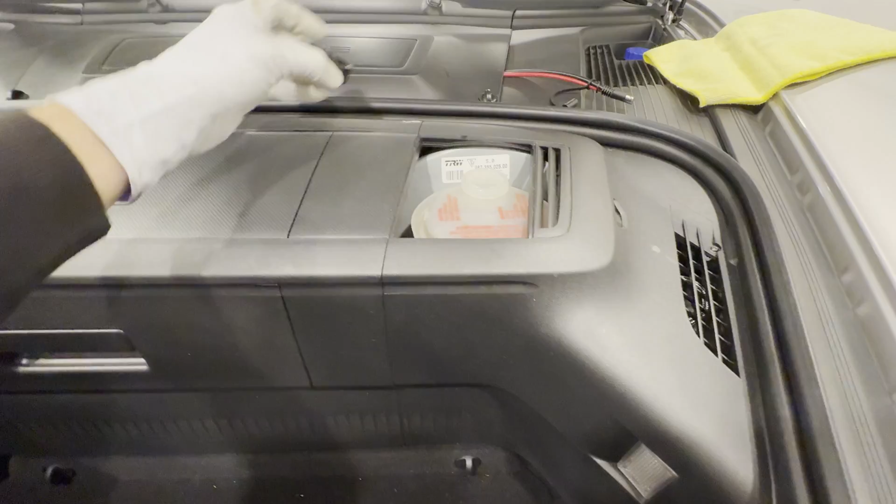You're gonna go ahead and buy a Motive power bleeder.

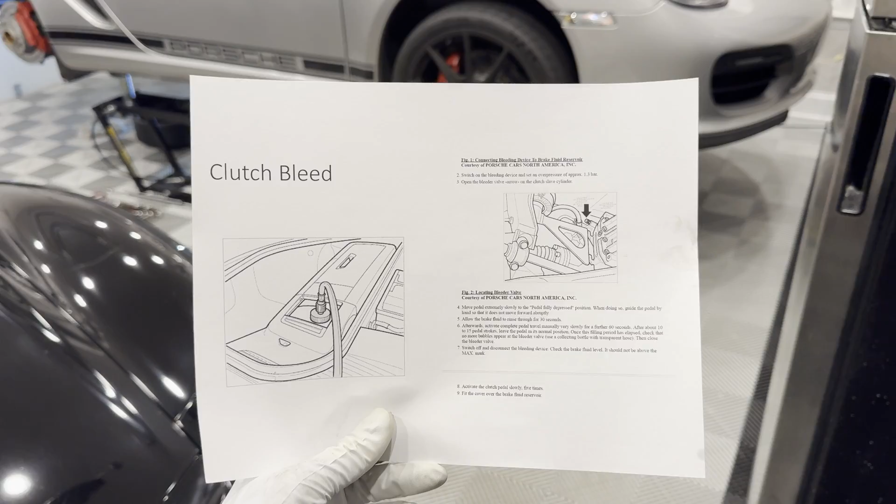And take some of your brake fluid, and you're gonna pour these bottles into this open container. All right, guys, straight from the Porsche factory instructions themselves. What we're gonna do is hook up this power bleeder to the brake fluid reservoir, and then we're going to pressurize this container to 1.3 bar.

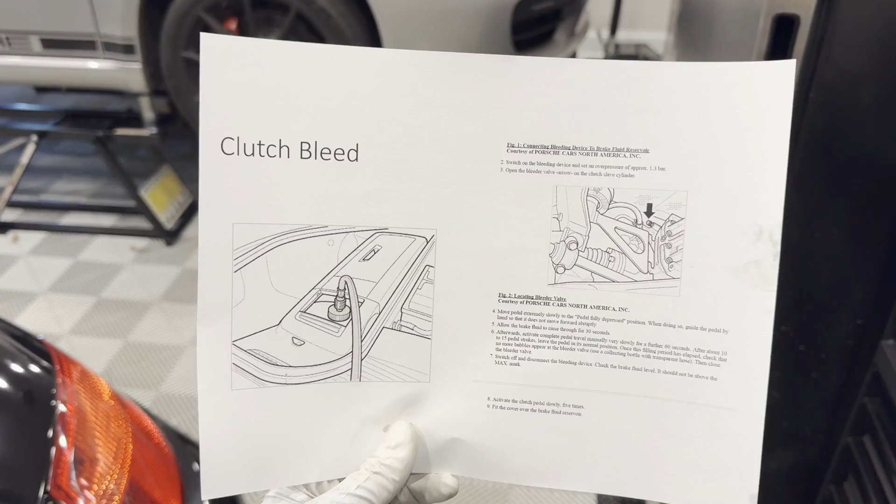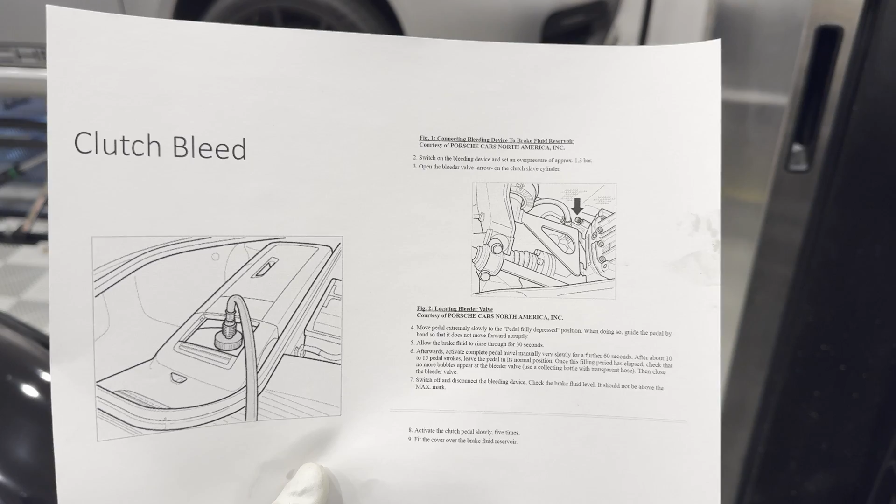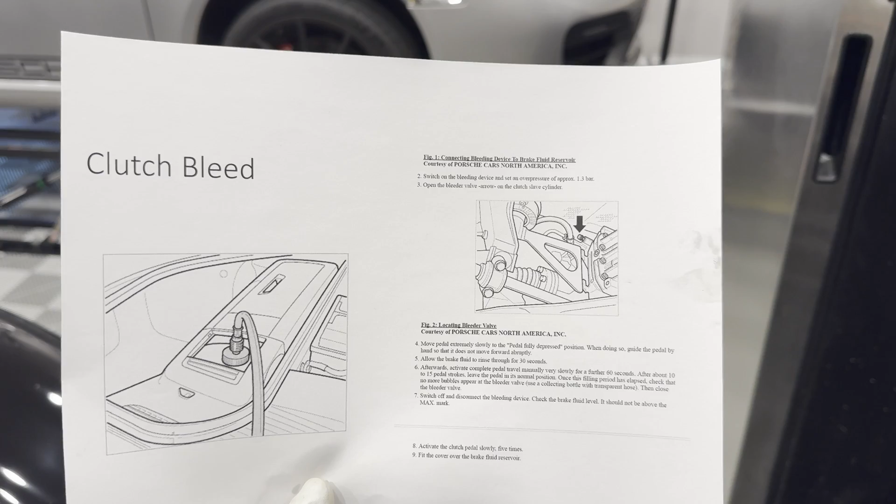After that, we are gonna go under the car, this picture right here, and we're gonna go crack the bleeder nipple, and we're then going to, with our hand, move the pedal to the fully depressed position. We're gonna do this by hand. We're gonna let the brake fluid rinse through for 30 seconds. Afterwards, we're going to activate the pedal manually, very slowly for another 60 seconds, about 10 to 15 pedal strokes.

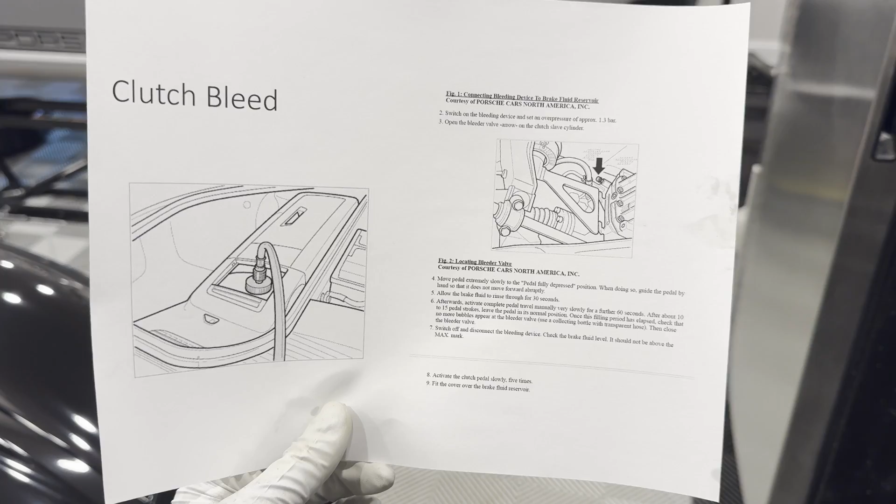We're gonna leave the pedal in a normal position, and once this filling period has elapsed, check that no more bubbles appear at the bleeder valve, and then close the bleeder valve itself. We're then going to disconnect the bleeder device, check the brake fluid level, top it off, and we're all done. Then we're going to go activate the clutch pedal slowly 5 times, and then we're going to fit the cover on the brake fluid reservoir.

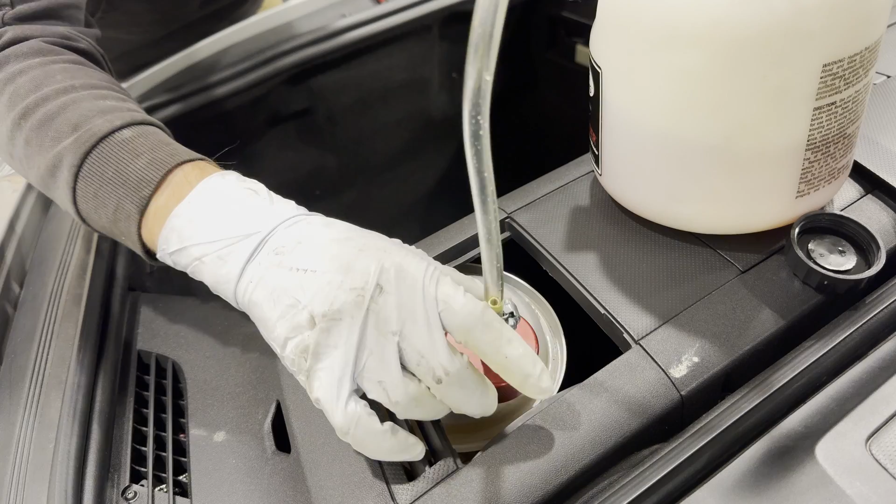All right, we've popped the top off the reservoir here for our brake fluid. Now I'm going to go screw this attachment onto the fluid reservoir itself. Once that's secure, we're going to go ahead and take this guy, put him on our power bleeder, just like this, all right? And then we're going to go pump this up to 20 PSI.

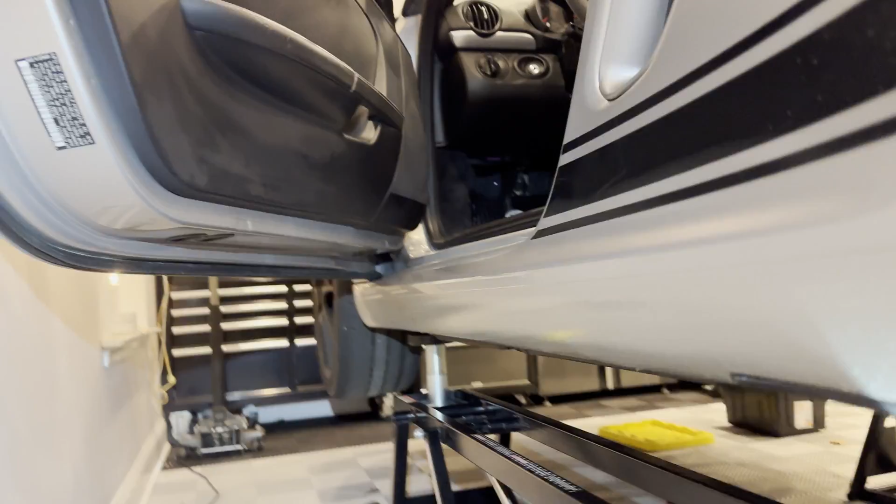All right, guys, we cracked the nipple right there. I'll show you my little configuration, but the clutch pedal is down. We did that by hand, very slowly, over to the bottom. We're gonna do this for 30 seconds. And then we're now gonna go pull up on the pedal very slowly.

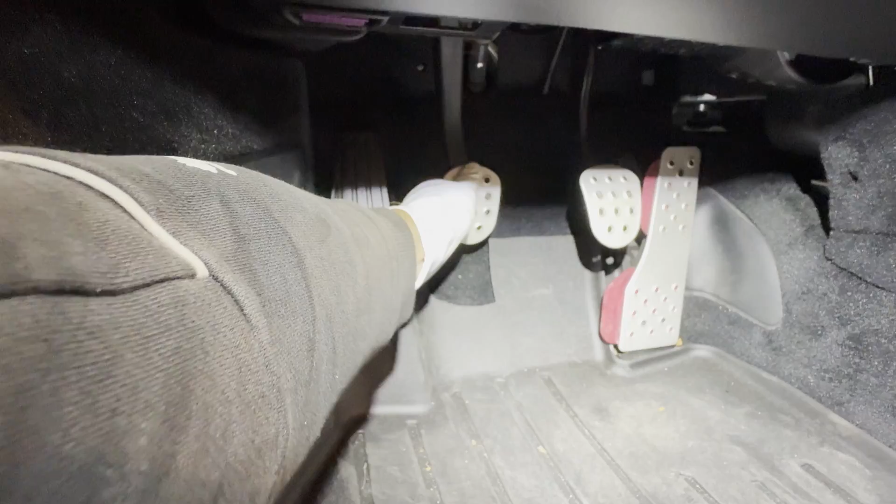Okay, right here. You can see here that we've got a little bit low on the pressure, so we're gonna go re-inflate this and do the pedal around 10 times. Make sure this never runs dry. All right, we went ahead and pushed on the clutch pedal very slowly in and out 10 times. It got firmer as we went. Next step. All right, we have a little collection vessel right here. Additionally, we went ahead and closed the bleeder nipple.

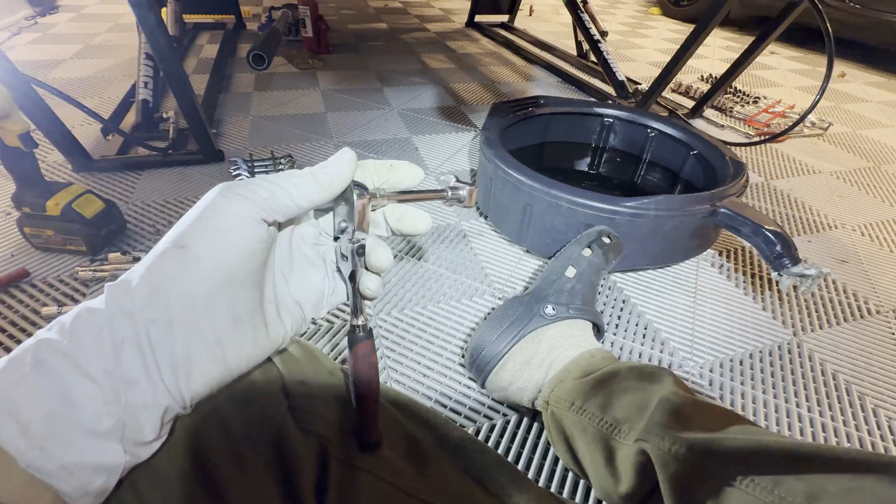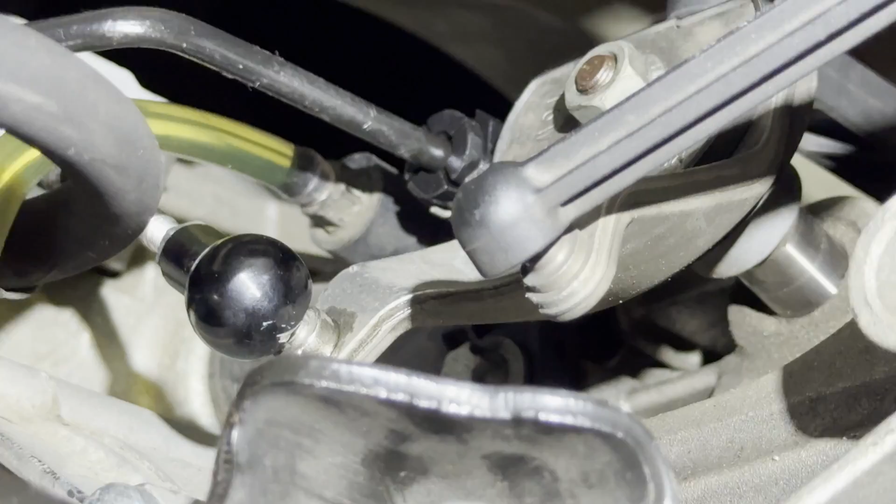The contraption I'm using for this is a 1/4 inch on a swivel, which goes to a little extension, and that goes to an 11 millimeter crow's foot, and that has allowed me to get in there and tighten and loosen that nut as needed. So now that we've done our 10 pedal strokes, we went ahead and tightened this nut so that no more fluid comes out. All right, at this point, after we drained the fluid out and done that procedure, the 10 clutch pedal presses, we went ahead and tightened this bleeder nipple.

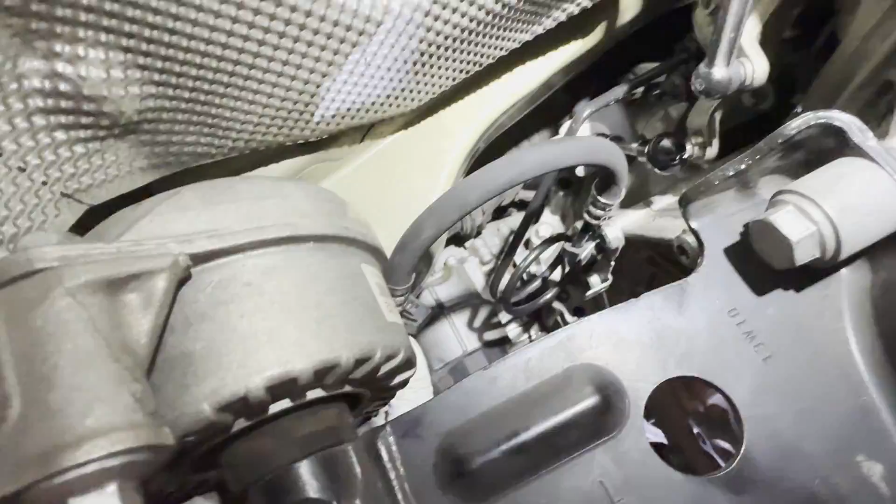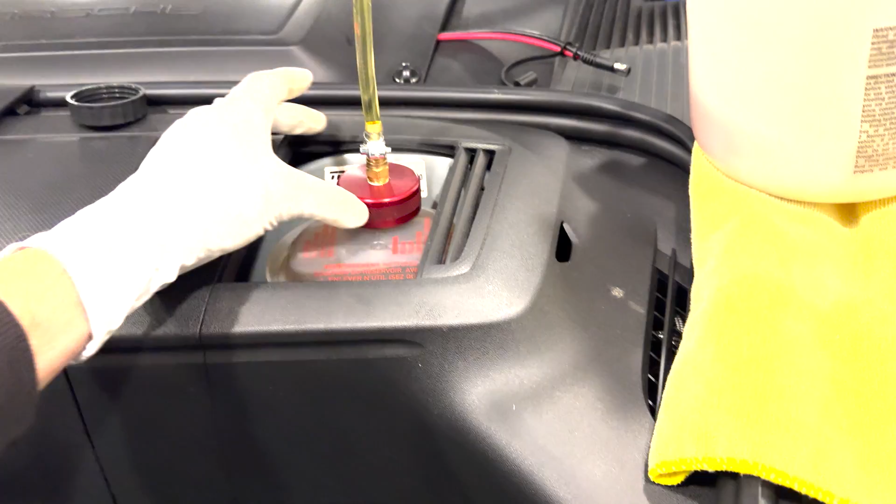Now we're gonna go ahead and clip this back in, as well as the blue clutch line right there. And now we're going to take our little rubber stopper right here, and we're just going to go ahead and push it on to that nipple. All right, go ahead and disconnect this fitting right here, and just make sure that your brake fluid is topped up to the maximum. If there's too much in here, you can always use a turkey baster and suck some out.

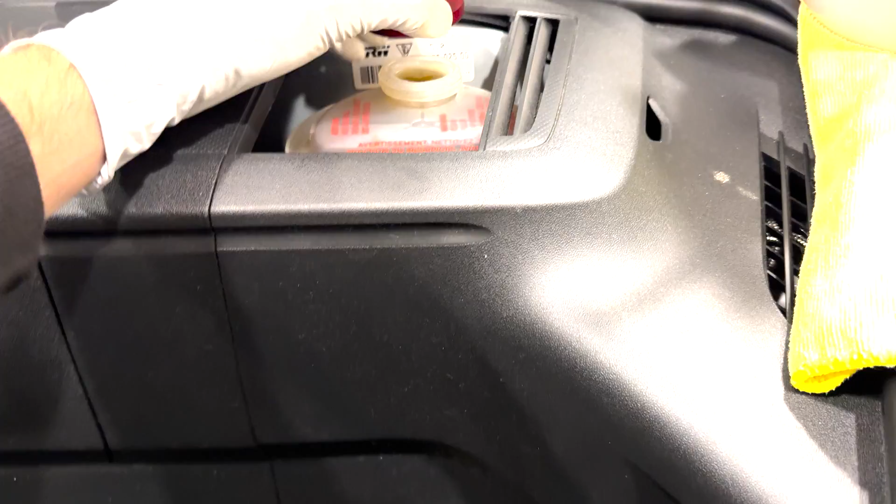All right, guys, you can probably see that my fluid reservoir here is a little bit too full, so I'm going to use my little vacuum pump to suck out some fluid until we reach the correct indicated line where it says max right there. All right, guys, that's going to conclude the clutch bleeding procedure for our 997.2 Porsche.